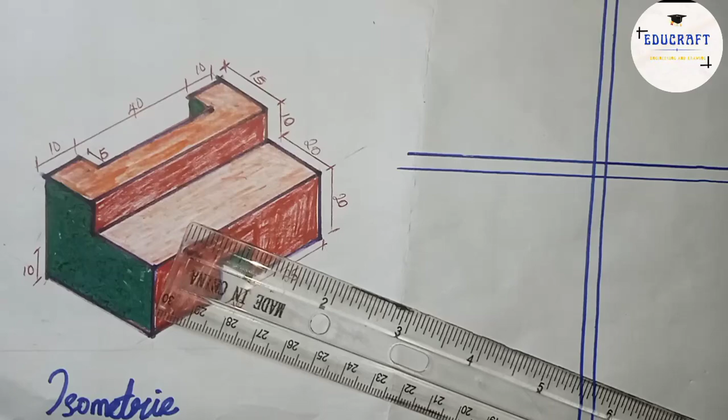There is something special and different in drawing first angle, and I want to show you in this video.

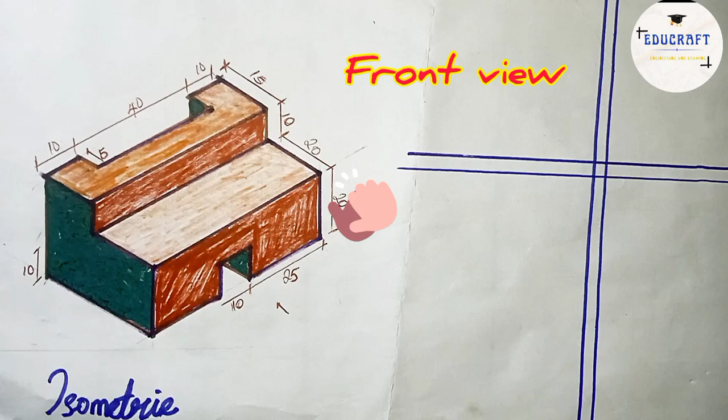Alright, let's get to it. So we're drawing this block in first angle projection, okay? We're looking at it from this arrow direction. And if you look at how I painted my object, this part painted red signifies the front view. The part painted green signifies the side view, and the part painted orange signifies the top view.

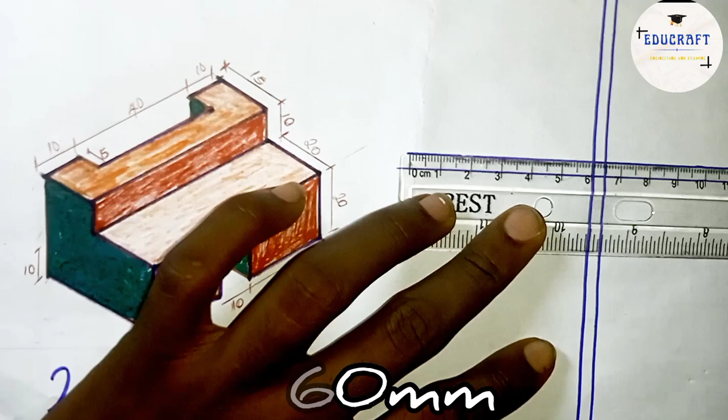Now we're going to be drawing this block in first angle projection. I want to get the total length of my front view. So this is 10, 40, 10. That is 60 as total length. So with my meter rule, I'll measure 60 at my baseline. Please watch very carefully. 60.

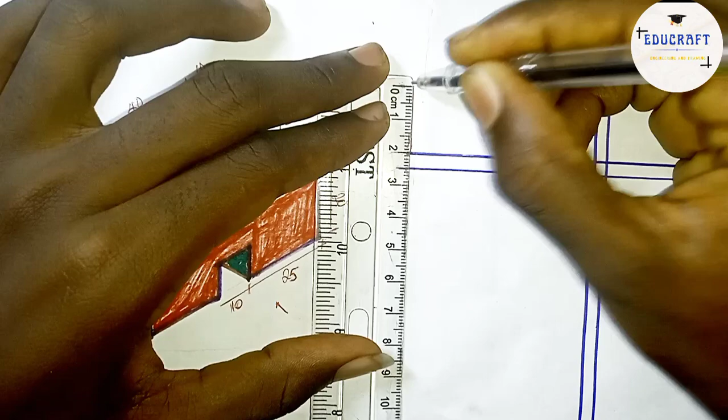Now I'm at this point here, okay. I'll go up with how many? 20. Go up with 20. From this other area, I'm still going up with 20. So I'll go up with 20. Mark that point, okay. Now at this area, I'm coming in by 25. I'll mark and draw. And then I'm going up here by 10. That is 1 cm.

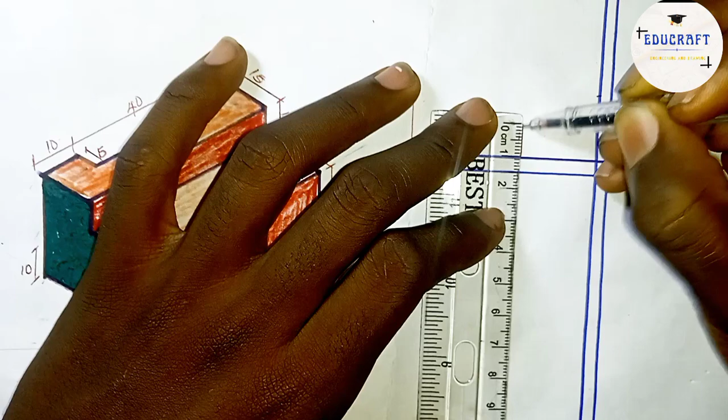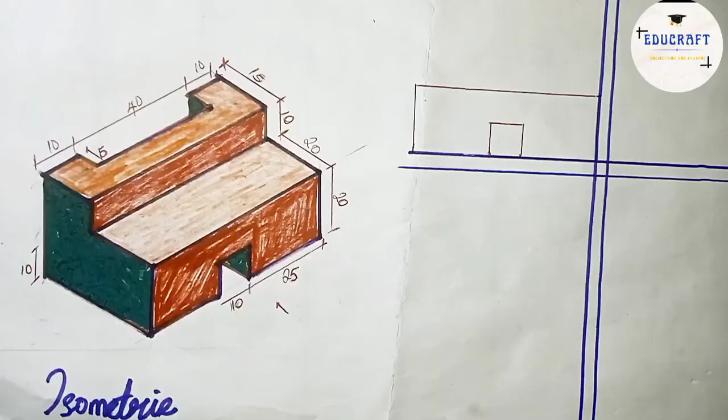Okay. The start here is also 10, 1 cm to this part here. Sorry. And I'll go up with 10 too. I'll join this part too. Now I'll also draw this upper part here, which is 10 and 60. 10 here, 10. Then I'll join it to 60.

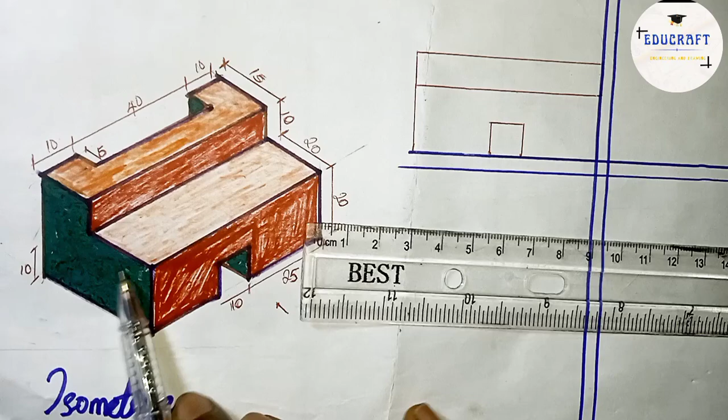Okay, now let's move over to our side. This part here is our side view, okay, from this area. So this and this. Now this total length here is 20 and 15, which is 35. So from here, I'll measure 35. Okay, so from here, I'm going up with 20. I just draw it up.

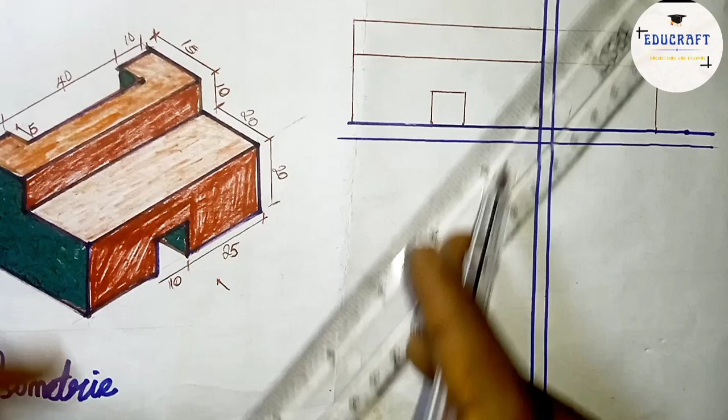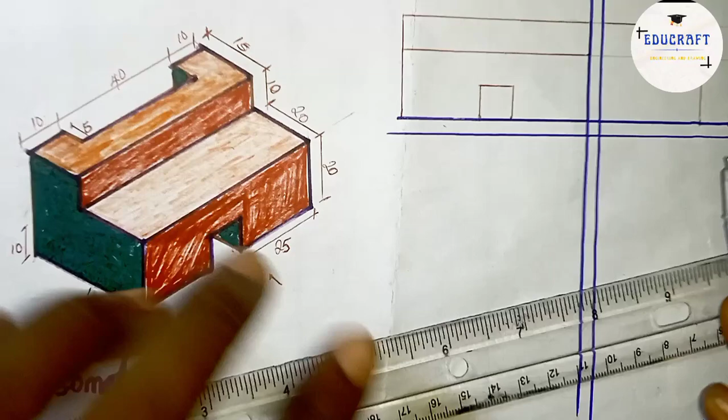Now I'll be going in by 20. So I'll be going in this way by 20. By 20, and then I'll go up by 10. This up here by 10. And then I'll finish it up. Okay, there is a little part here. So this line here, okay, it's like this part here. I'll join it straight.

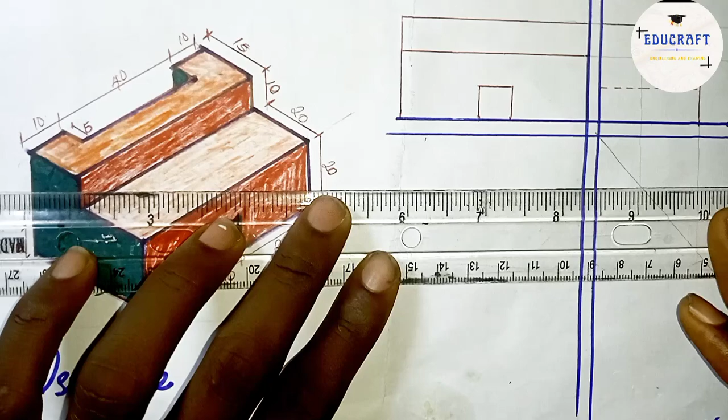And to do that, I'll do some elongations. Place it here. Place it this way. Okay. So I'm bringing it down. Bringing it down. Bringing it this way too. I'm bringing it this way. Also this part, I'm also bringing this part down, so here and here.

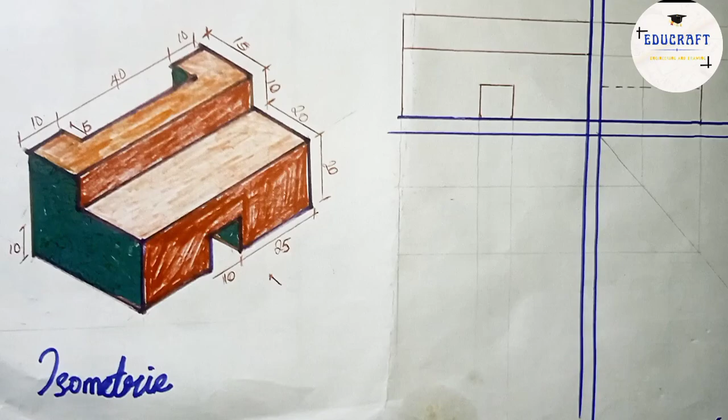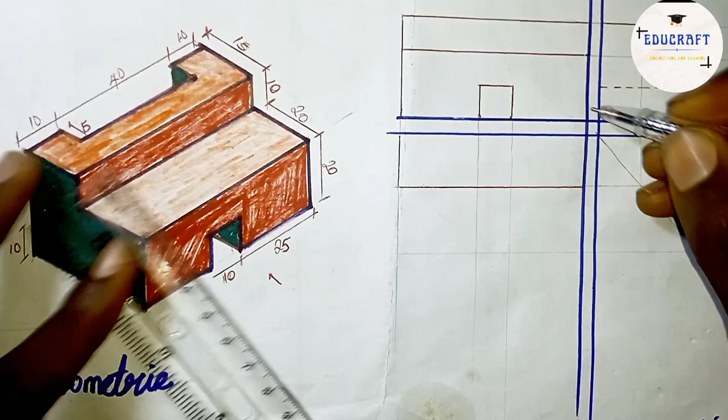Now the top view. At the top view, which is this part here, okay, so I'm going with 15, 60, 15. Should give me 15, this part here. 15, and this should give me my 60. Yes, 60, and okay, 15 again, 15. Now this is 10, and here 5. 10, 5, 40, 5, 10.

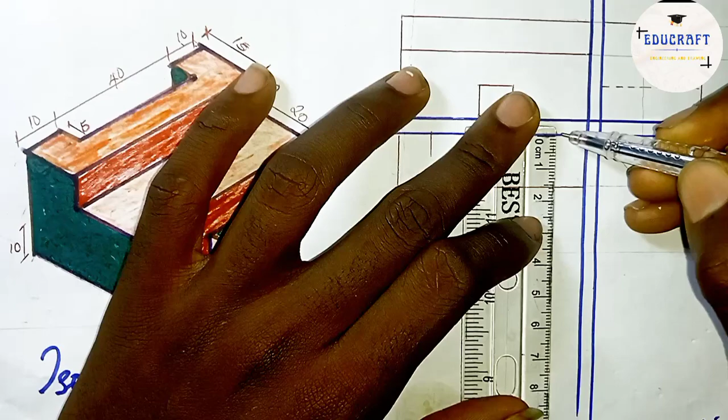So I'll go with 10 from here, going with 10 from here, so I'm also going with 10. Now bring it down with 5. Bring it down with 5. Now join it. Okay, and then to that part here too, this base part, which is 20, 60. So automatically here is 20 already. So I'm gonna go with

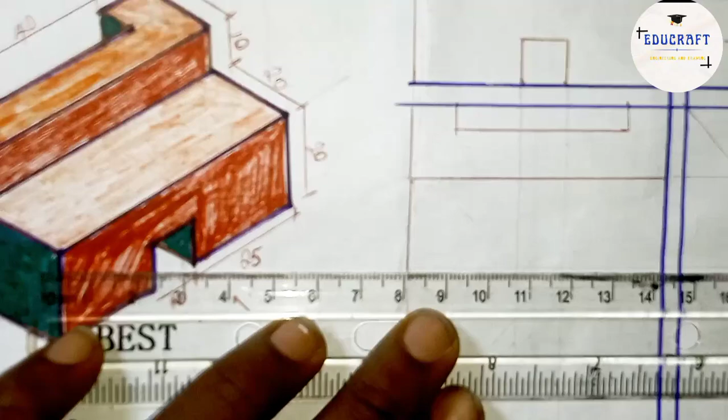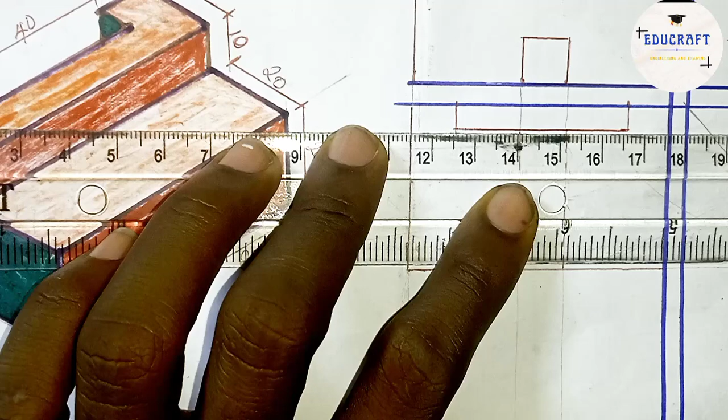this. Now remember, there is something under here. Okay, so let's go with broken lines just like this. Okay, now please mind you, just in case of next time, if I should trace this part here, there's a mistake actually committed in this part of the drawing. If I should trace it this way and bring it up here, there won't be any broken line here. My broken line automatically starts from this part here.

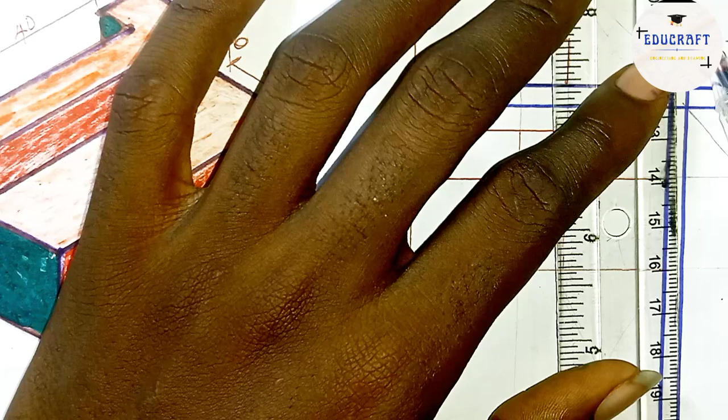Okay, it's actually a part of our side view that was omitted, which is this 0.5 here. It will appear as a broken line too. So I'll mark my 0.5 and bring it down. This is how the three views of this drawing look.